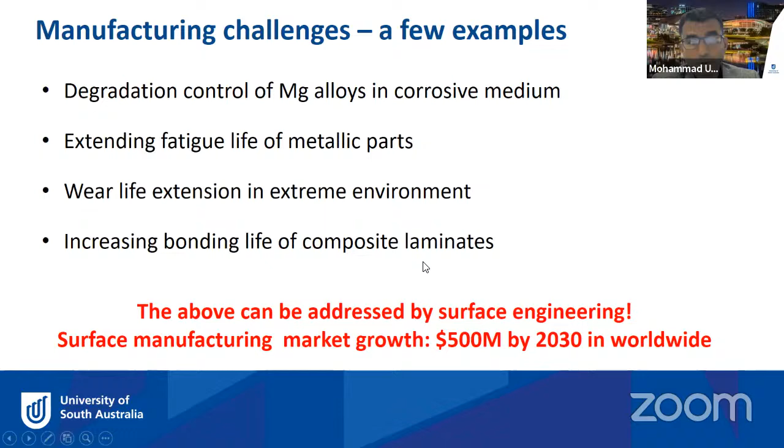Just to give you a little bit of this, I mentioned about this biodegradable magnesium implant. My research group has been working on this particular material for some time, and we try to apply different sorts of surface engineering techniques or surface modification approaches. So this is just an example of the implant, like the bone implant. If you have a bone fracture in the lower limb or hand or wrist, anywhere, generally the permanent implant, like the metal, stainless steel, or other types of permanent implant, is put into the bone, put into the body to basically restore the function of the bone for a certain period of time. And then after the bone has healed, the implant has to be taken out from the body through some sort of surgical procedure. However, this particular material, we call it the biodegradable magnesium-based implant.

So this implant would be made of a magnesium alloy kind of material, so that it degrades into the body over time. However, the main problem with this material is the faster degradation, because when the material comes into the corrosive, salty media within our body, it actually degrades. So the appropriate control of the degradation is very critical to realize the potential of this particular material.

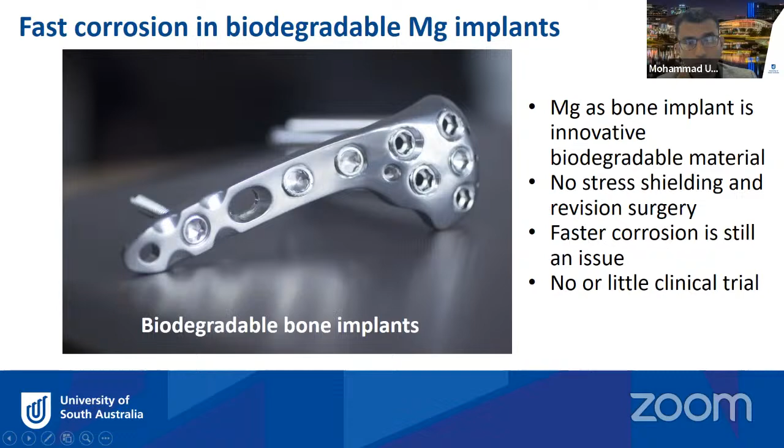So this is one of the areas, and I just briefly mentioned that. Giving you more details about what are the critical equipment or components subject to some sort of extreme or harsh environment. In mining, some of the critical components, like you can see here, a slurry pump. So a slurry pump is very complex machinery, generally used to transport abrasive slurry of minerals from one place to another. However, because of the abrasiveness of these minerals, a number of critical components within the pump are subject to impact, abrasion, erosion, even corrosion. These are some of the components, like the throat bush, the slurry pump casing, and then impellers.

Also, over time, they actually wear out, right? So the failure basically starts at the surface of the components, because of the wear and impact of those things. And you can imagine that in the mining industry, like in Australia, it's a very serious business. So if there is downtime because of the failure of one of the components, there's a huge significant loss, right? So these are very serious problems in Australia, in terms of how you can actually develop or improve the service life of these components.

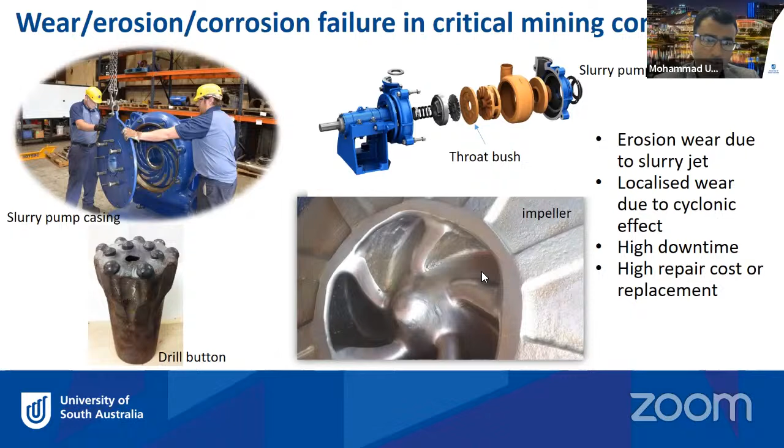Of course, in the aerospace industry, composite laminated structures are being used a lot because of their lightweightness, and also they can absorb energy impact, along with the lightweight structure. So what is the composite structure made of? Generally, you can have a lattice structure in between, but basically two or multiple sheets are stacked together and bonded to make a lightweight structure that can go into different components in aerospace, for example in aircraft. So composite is being used not only in aircraft or aerospace engineering, but there are many other areas where composite is growingly used.

So one of the issues in the laminated composite structure is the bonding between the sheets. It could be between metal and metal, or metal and plastic in the sheets, right? So the bonding with some sort of adhesive is very critical to the integrity and the service life of that particular component. So we believe that surface engineering could also be applied into this kind of sheet metal or laminated structure to improve their service life as well.

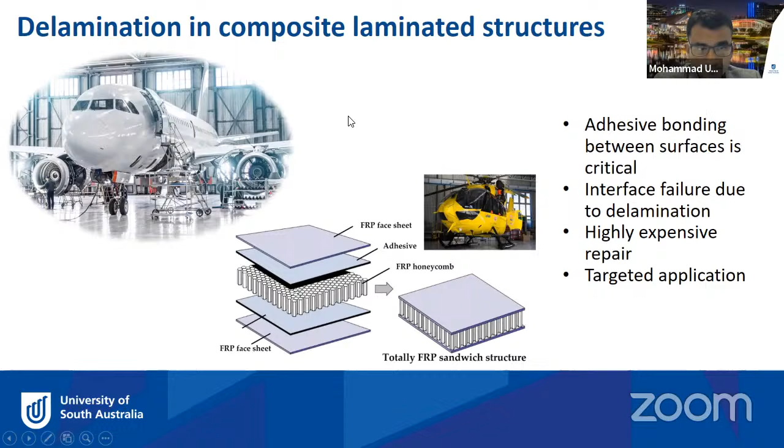So these are some of the areas where there is a lot of research going on, but there are still challenges, and innovative research work is being constantly developed. And as part of that, we are also getting into this kind of area to really discover some of the new technologies or new processes and new surface engineering techniques to improve. Okay, along this line, I think so.

Before you do any surface engineering or surface manufacturing, you first have to manufacture the bulk of the component. There are generally two ways the component is made: either the conventional manufacturing process, or nowadays additive manufacturing, which has also been around for a long time and is growing quite a bit.

Conventional manufacturing involves casting, starting with the casting, and then machining and other processing. You can make any part, any component, by the conventional manufacturing process, but it has some limitations. It is often time consuming and costly, because you have to make significant molds and dies to do the casting.

There are some benefits too. By casting, you generally can make very homogeneous and isotropic products, so this is pretty good. But there are some other problems, like material waste by machining. The cast product component cannot be used immediately - you have to do machining and other processing to get the right geometry, tolerance, and finishing.

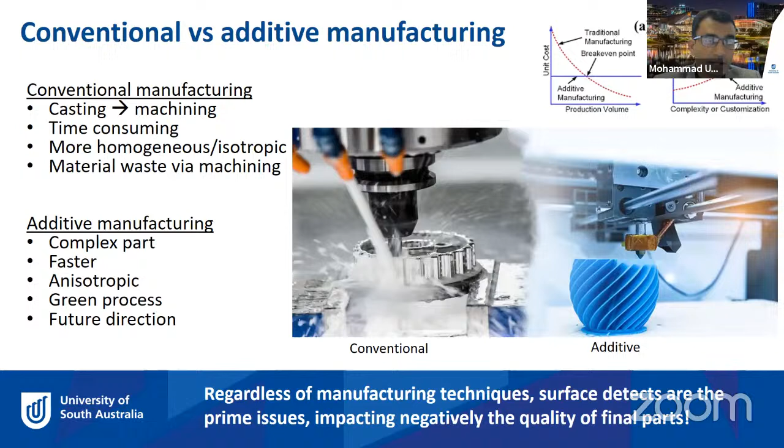That means before we get to the final product, we need to do some sort of surface modification or alteration - that's what we call surface manufacturing or surface engineering. If we can innovate surface engineering, we can improve the surface and mechanical properties of the component, which helps extend the service life of the product.

When we talk about surface engineering, we need to look at what the surface characteristics are, which ones are very critical and can actually cause mechanical failure. Generally, any sort of failure starts from surface imperfection, like any sort of surface defects.

So what are the surface defects? The surface could be rough because of roughness, and the surface or component might have some sort of microstructure that is not favorable to specific properties.

The material might have some porosity because of the nature of the manufacturing process, either conventional or additive manufacturing - each process has its own kind of problem. So the product might have porosity, and this could be another reason for mechanical failure of your final product or component in real application.

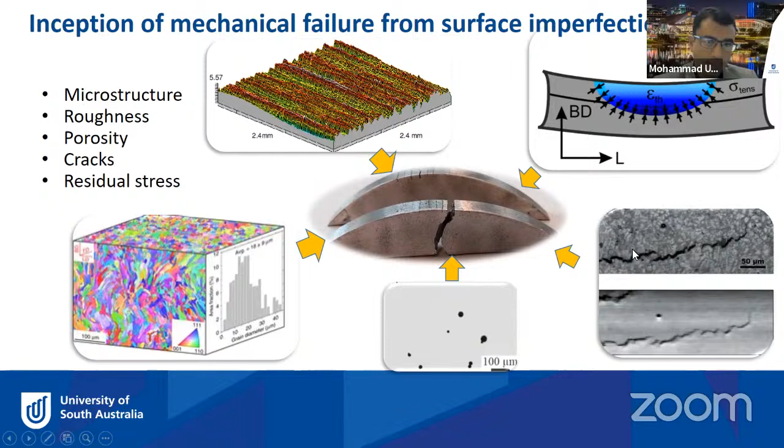Cracks, residual stress - these are some of the surface integrity properties or surface characteristics that are really going to affect the failure, in other words affect the performance of the component. So why surface engineering, and how can we do that?

Surface engineering is nothing else but to really alter the surface texture or the microstructure of the material at the surface level as well as the subsurface level. For example, as you can see here, this is the cross section. You can see some of the grain of the materials, and the surface is a bit rough.

So surface engineering, we can actually modify the surface. We can really improve the surface texture, and by doing that surface modification, we can also change the microstructure. That means you can modify the grain alterations, and that's going to really improve some other properties. We can actually improve the surface finish, induce some sort of work hardening because of the surface modification techniques, and reduce the porosity as well.

So by doing these surface alterations, the final outcome we want to see is basically improved hardness of the material, because the harder the material, generally it would be more wear resistant. So this is another important property. Corrosion protection: some of the components need to have very high corrosion resistance, wear resistance, and we can improve the fatigue life as well, fracture toughness, and also wettability. Some materials need to be more wettable, some are not. So we can basically control the surface texture as well, which gives us the different sort of wettability or specific wettability we need for a specific component.

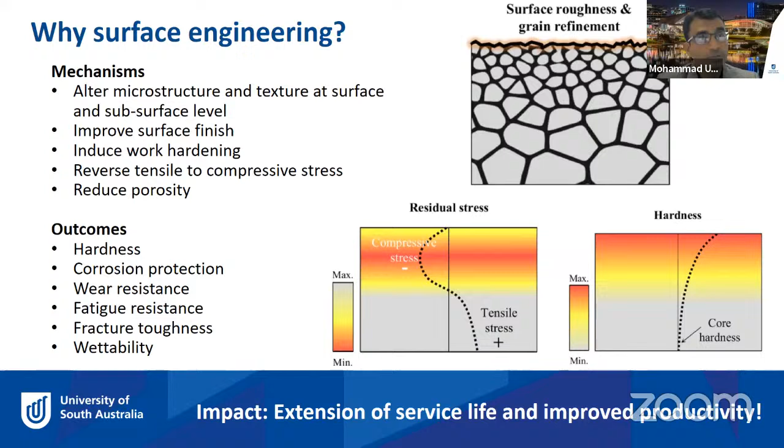So now the question is, what are the surface engineering approaches currently being used in the industry or in the research arena? There are a range of surface modification or surface engineering approaches being used here. Starting from machining, laser shock peening, UNSM, SMAT, and also cavitation peening and shot peening, plasticity burnishing, which is kind of a roller, deep rolling, or you can use a ball or roller to really modify the surface.

And also you can do coating, which is another surface modification technique. So there are a range of surface modification or alteration approaches being used.

My research group is basically focused on one of the surface engineering techniques, which is plasticity burnishing, and we also do some work with shot peening as well. Machining is a very common process, it's a very generic approach, but in order to really create or induce some sort of modification into the material, plasticity burnishing and shot peening are quite used now.

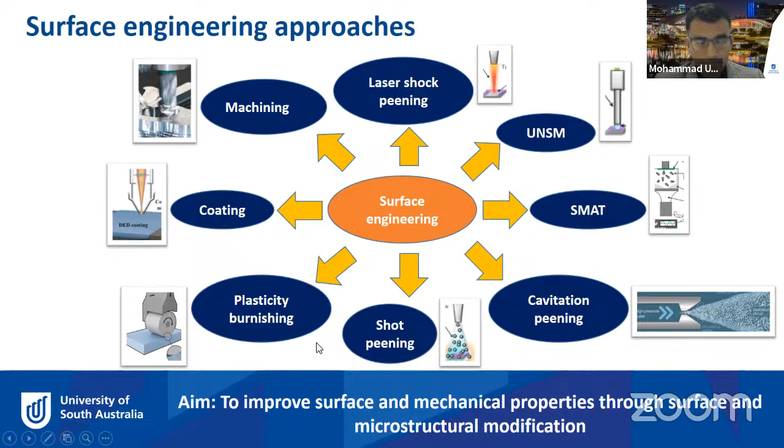So these are the techniques that are being used, and they're very much beneficial, but they might have also some challenges specific to each of the techniques. So I'm going to give you a few case studies from my research group here.

One example is that I mentioned about the implant. We thought we can apply the ball burnishing technique, which is basically nothing else but applying force onto the material by a spherical ball or roller. This ball applies compressive stress into the material and plastically deforms the peaks and valleys of the material. So you can actually improve the surface finish, as well as modify the grain of the material.

Generally you may basically make the grain go from coarse to fine to improve some of the surface properties. But in this particular approach, we have applied that to control the degradation of the magnesium implant.

We also, after the ball burnishing, applied the hydroxyapatite coating. It's like a hybrid surface engineering technique - hybrid ball burnishing plus HA treatment. By applying the hydroxyapatite coating, we basically create a barrier layer onto the burnished surface. By adding this layer or coating, we actually augment further the corrosion resistance of the magnesium alloy, so we can actually extend or delay the degradation process for some time.

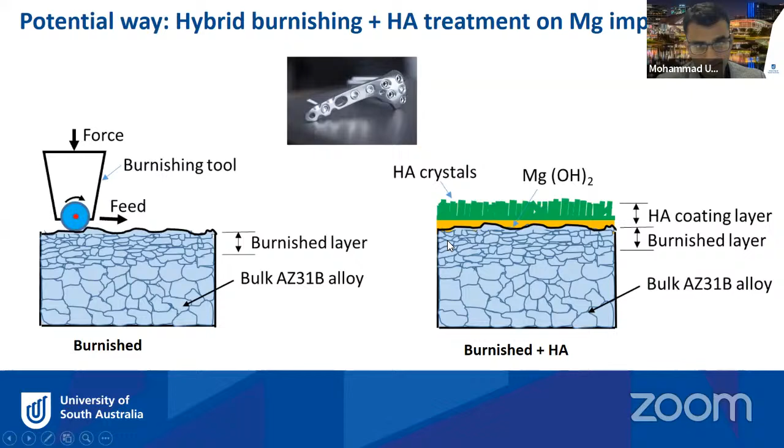But we don't want the material to not be degraded - we want the material to be degraded, we just want to delay the process by creating this sort of layer onto the magnesium alloy. So we have done some study here: we looked into the surface, untreated and burnished surface, and then we applied the coating on top of the surface, and this is the HA coating.

And we also did some roughness analysis. We found that by applying the coating on top of the burnished surface, the surface becomes rough. As you can see, the coated surface looks pretty rough here.

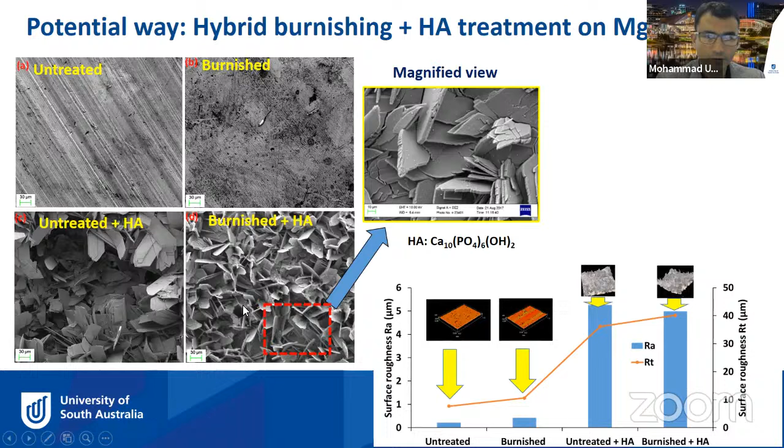We did some hardness measurements. After the burnishing, we wanted to see the effect of the ball burnishing, which is basically the cold hardening process. We found that the burnished surface hardness has increased up to a depth of about 400 micrometers.

Then we looked into the contact angle, which shows the wettability of the surface, because the magnesium implant has to go into the body, so the bone has to really match with the implant. Surface wettability helps integrate the bone with the implant. We found that the modified surface has much more wettability.

We also looked into the adhesive strength between the coating and the burnished surface. We found that the coating has got very good strength, which also means it gives better corrosion resistance.

We finally did corrosion resistance testing to understand the degradation and kinetics of the burnished or modified surface. We found that the burnished surface and the burnished-plus-coated surface significantly improved corrosion resistance, so the approach actually worked pretty good.

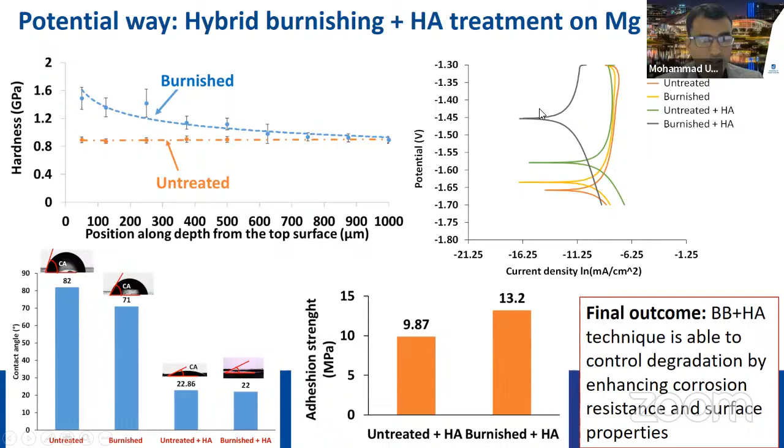We also recently applied the same ball burnishing technique onto laser metal deposited alloys, for example this laser cladded process. Generally we can deposit coating onto metal components to repair them. However, the problem with laser metal deposited alloys is the surface is very, very rough.

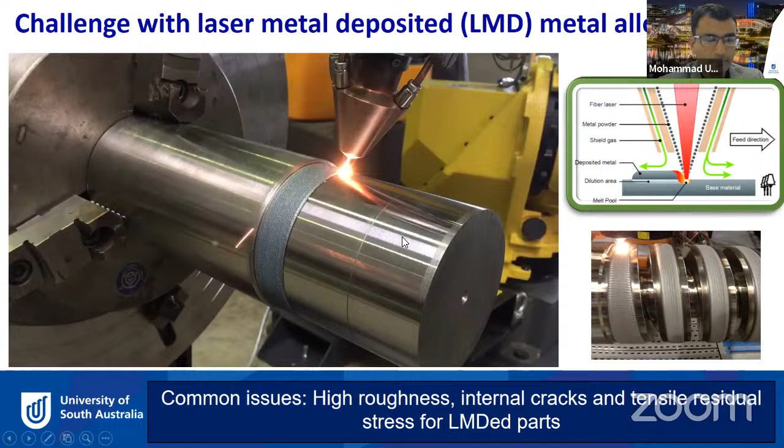As you can see, the surface becomes rough. This is one of the components after laser cladding, and there might also be other inherent properties like porosity and cracks. So we thought we should apply the ball burnishing treatment onto the laser cladded surface to improve its mechanical properties as well, and we did that.

This is the technique. I'll show you the video of the ball burnishing technique we apply. The sample is set up on the table, and this is the ball burnishing tool being pressurized by the hydraulic fluid, modifying the surface.

And these are some of the results we have. You can see that after the ball burnishing, surface roughness has improved significantly. Similarly, we also looked into the hardness improvement, and we can see that at the top surface, the surface hardness has improved significantly.

We also looked into the corrosion resistance of the material. We can see here the corrosion resistance, which means a higher potential or less current density, indicating the material has got higher corrosion resistance. So this is another nice outcome of this treatment.

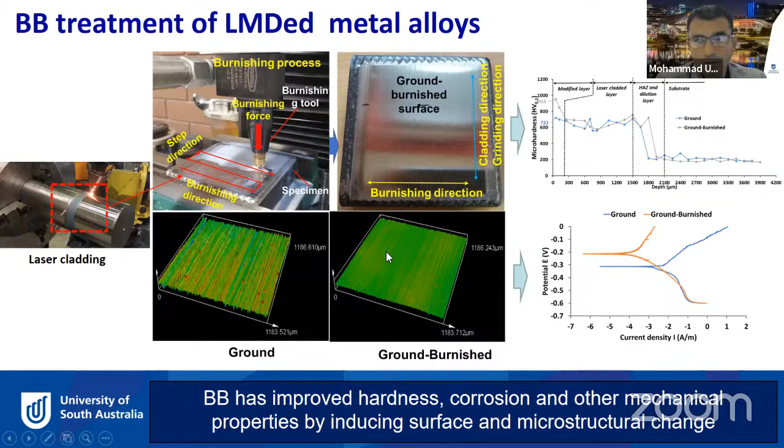Recently, we also looked beyond mechanical properties like hardness, corrosion resistance, and surface roughness. We also looked into the fatigue life, which is very important for components, because most materials or components actually fail due to fatigue. So we looked into the fatigue performance of this material.

We prepared the fatigue specimen, like a dog bone specimen, and ball burnished both surfaces of it. Then we put this specimen onto the Instron universal testing machine and applied cyclic loading at 10 hertz, looking into the number of cycles until the material actually fails.

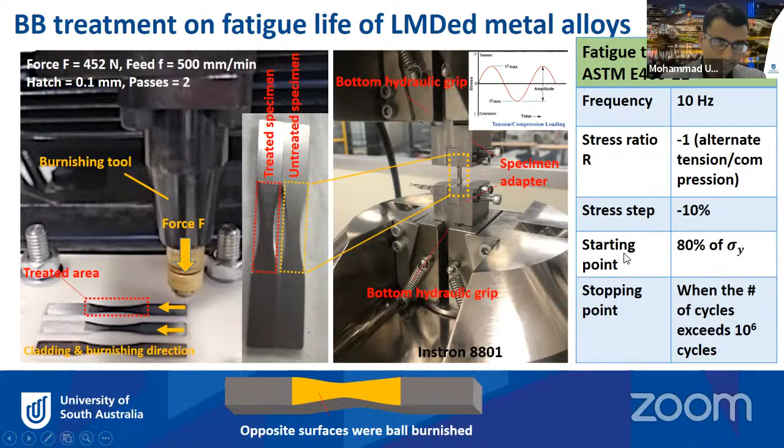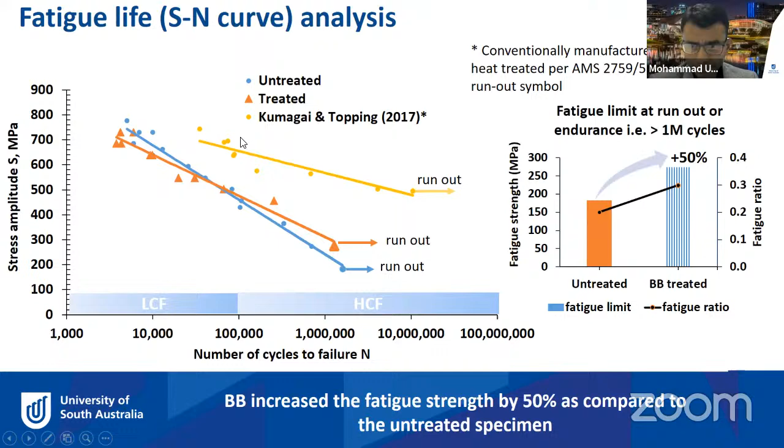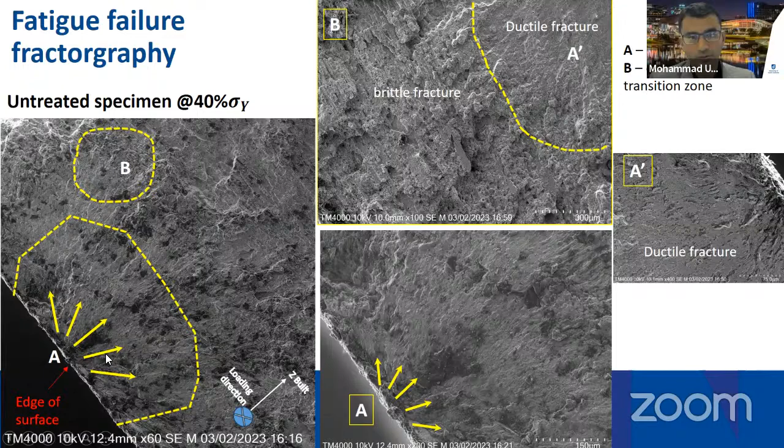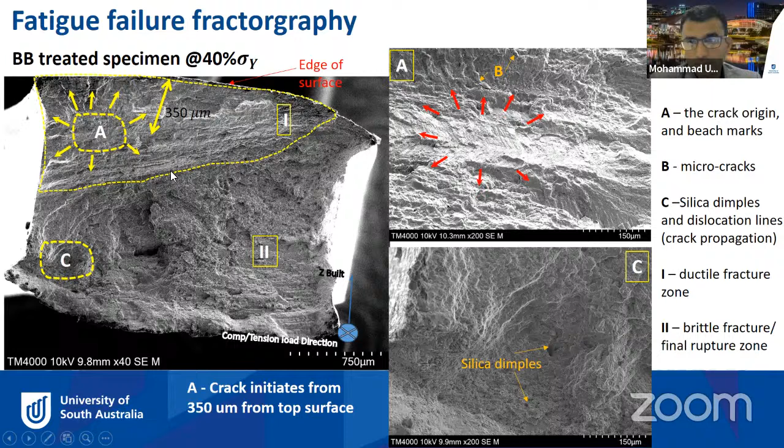Then it propagates until it's fractured. However, for the treated surface after our ball burnishing treatment, we found that the crack actually initiated not from the edge of the surface, but rather somewhere inside, around 350 microns deeper. That means after we applied the ball burnishing, we modified the subsurface microstructure, which allows the crack to start a little bit from the subsurface rather than from the edge. This is another indication of the improvement of fatigue life by ball burnishing.

So these are the treatments I've shown you earlier—these are offline treatments. You make a sample and do the treatment later, offline. However, nowadays in situ hybrid surface treatment is growing, because it is very important especially in the case of laser metal deposited metal alloys.

For example, you have the metal deposition process, and generally after metal deposition the grain of the microstructure is coarse. However, if you add another treatment tool just next to the machine onto the laser head, you can modify the interlayer right next to the laser deposition. So by doing the in situ treatment, the cold working, you can modify each surface layer to improve the properties.

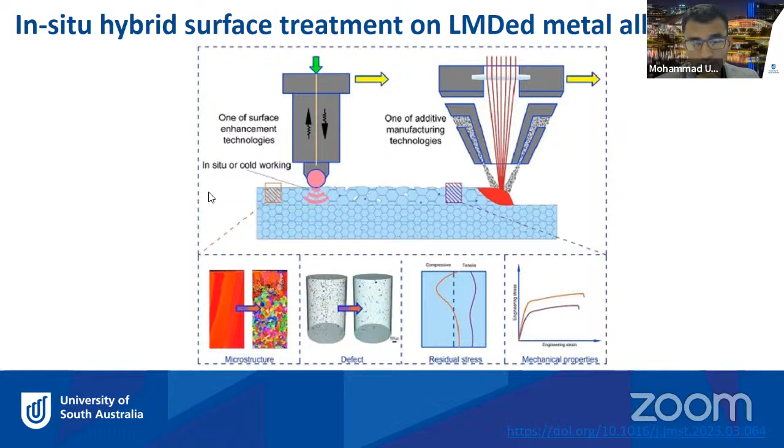So in situ hybrid surface treatment is growing and quite popular. One of my students is now working on this in situ hybrid surface treatment. Computational modeling is also growing to optimize these in situ or hybrid ball burnishing or surface engineering techniques. This is just one of the

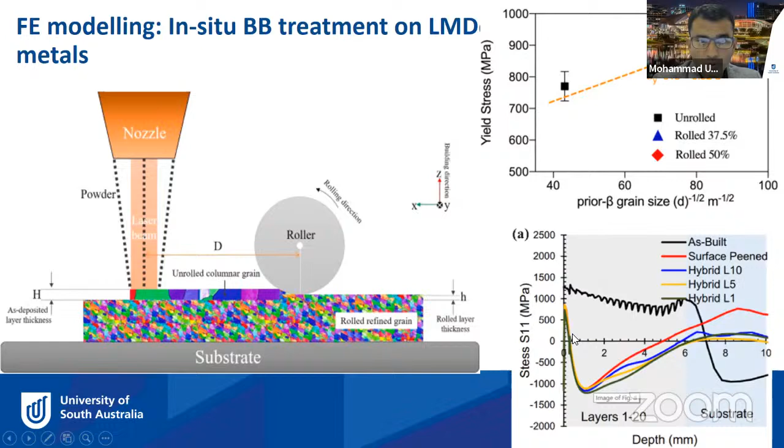This can be seen in this picture—you can improve mechanical properties like yield stress, as well as create compressive stress in the subsurface, along with the ball burnishing treatment, which is like cold working, where you have a tool with a ball rolling onto the material.

However, my group has also recently focused on laser treatment, which is not to manufacture the coating, but rather to really surface finish the component.

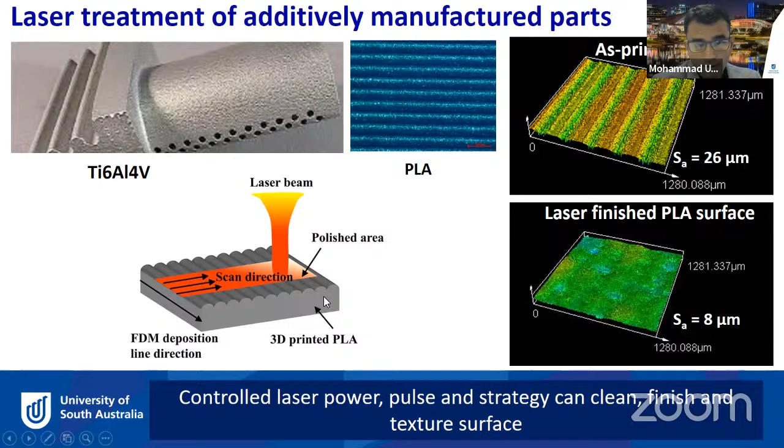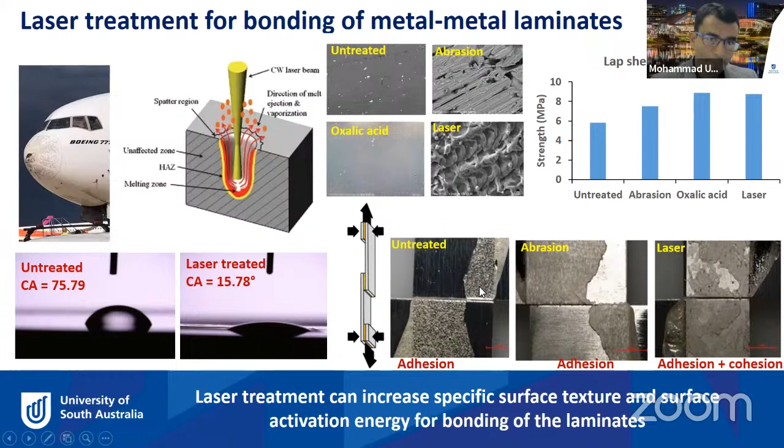We have also done tests after the laser treatment—we make the bonding of the sheets and make the laminates. Then we also investigated the perforation resistance of the laminated sheet, or metal plastic laminates, with three different types of indentor: conical, hemispherical, or blunt. We found that the failure of these laser treated laminates showed a very regular and good performance as well.

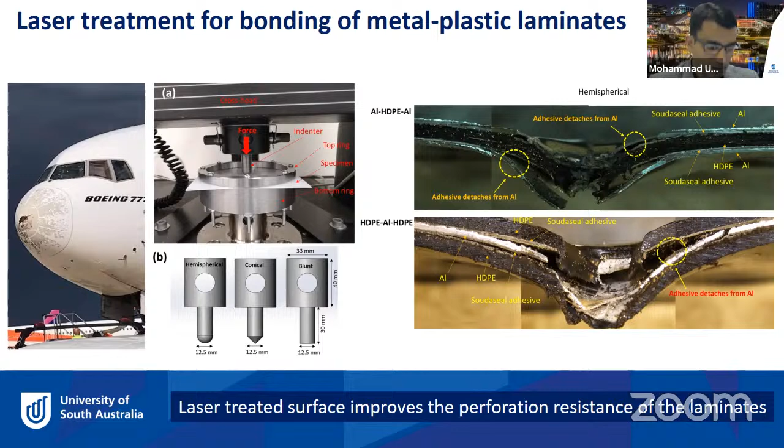Some of the emerging areas in surface manufacturing is basically, it's not just about doing the treatment—you manufacture a component, either by laser manufacturing, and then do some surface modifications later on. However, we can actually improve the process much better if you can monitor and understand the process better in situ.

That's why nowadays a lot of smart sensors are being deployed around the machines to really monitor and detect some of the process characteristics for potential improvement or optimization. So that means you can have a camera, different sensors, a laser sensor to detect, or a pyrometer to detect temperature, and even an ultrasonic sensor to detect some of the failures, like for example crack failures, during the laser cladding as well.

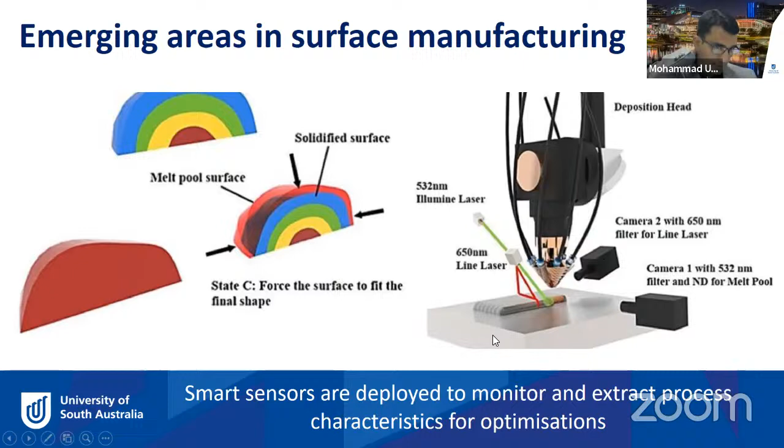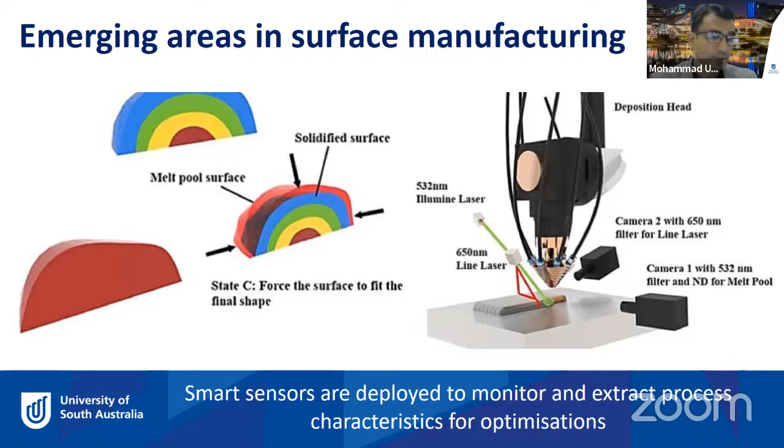A lot of smart sensors are being used in the industry to detect, for example, the laser metal deposition process. Because if you know more information about the process, then you have a better understanding of how to optimize the process and how you can actually get a better final product. So that's the main reason for doing that.

And while you have a lot of sensors involved, it's coming down to taking advantage of Industry 4.0. One of the speakers yesterday, I guess the Collins Aerospace presenter, was talking about the Industry 4.0 revolution. I think this can exactly be applied to the surface manufacturing area as well.

And it is being used now. So basically, Industry 4.0 is nothing else but utilizing all this digital capability—you make the whole industry, the physical industry, into the digital format, process, equipment, machines, everything, and then you can see the whole process and monitor the performance of the whole process just in front of the computer.

So there are a lot of benefits of doing that. Of course, you can monitor easily from anywhere, right? And it will give you better process control.

You can have more information on the process and product, so you'll have the ability to really control for potential improvements. You can develop new types of materials and alloys, and also help for quality control as well.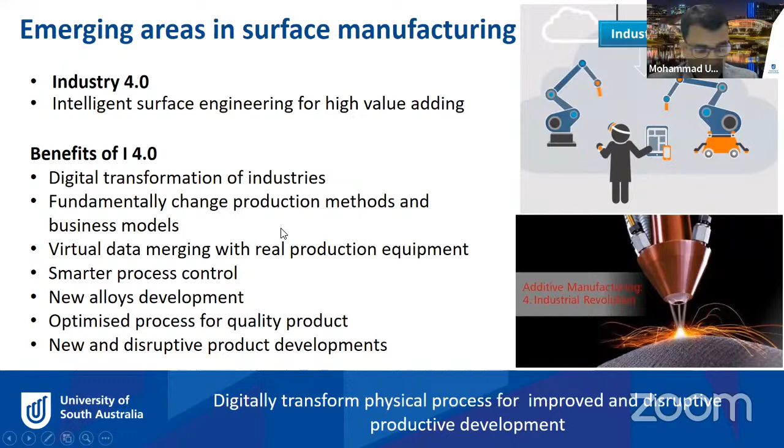In the case of surface manufacturing, like surface modification techniques and laser metal deposition, Industry 4.0 is a big thrust to really improve the whole process. Along with Industry 4.0 or digital transformation of the industry, machine learning or artificial intelligence is playing a key role to give another level of improvement.

So what does that mean? Once you collect all this data through sensors like IoT, in real time, it is not enough to just get the data. We need to really process and analyze it, and that's where machine learning or data analytics gives operators or companies insight into what the data means for them from a business perspective.

Machine learning, which is a kind of artificial intelligence, together with data analytics tools, will create improved sustainable productivity and resource management for surface engineering areas.

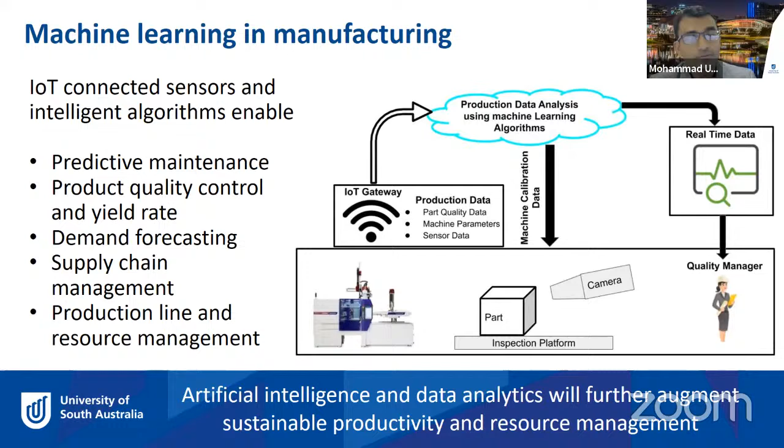That's pretty much the end of my talk, so I'd like to finish with a summary. What I'm trying to say today is that surface manufacturing, or surface engineering, of a material or component is very critical, and it is at the heart of the economic growth of any country, really for the growth of manufacturing. As manufacturing grows, the country grows.

So the opportunity for surface manufacturing in product development is enormous. There are different ways you can apply surface engineering to improve your product and improve the service life of the component. I've given you a few examples, but there are plenty of other areas where surface manufacturing can be applied to improve productivity.

Surface engineering could enable development or improvement of critical products with tailored properties. Tailored properties means you can manufacture a component or part with the specific properties needed for that particular application. The technique can dramatically increase the service life and productivity.

Surface engineered products and solutions will create a niche market, as I mentioned at the beginning of my talk. That means if you can come up with an innovative surface manufacturing technique, you create a new type of product — a disruptive product, a niche market, and that is competitive for your business.